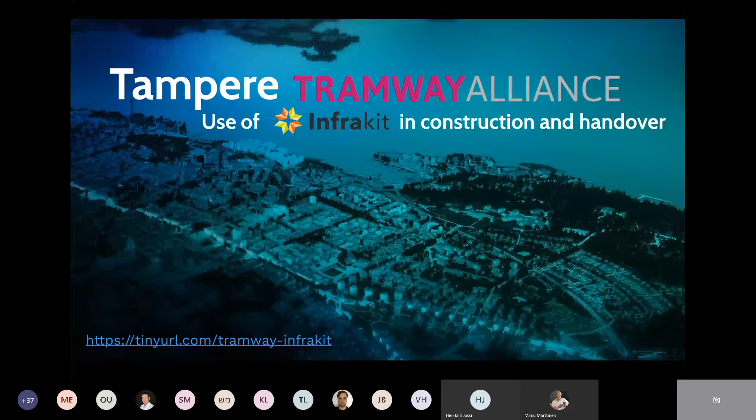All right, so Tampere Tramway Alliance, use of Infrakit in construction and handover. I'm Teppo Viinikka, head of surveying at Tramway Alliance from Sweco Infra and Rail. The main topics will be the project in general, use in construction, and handover.

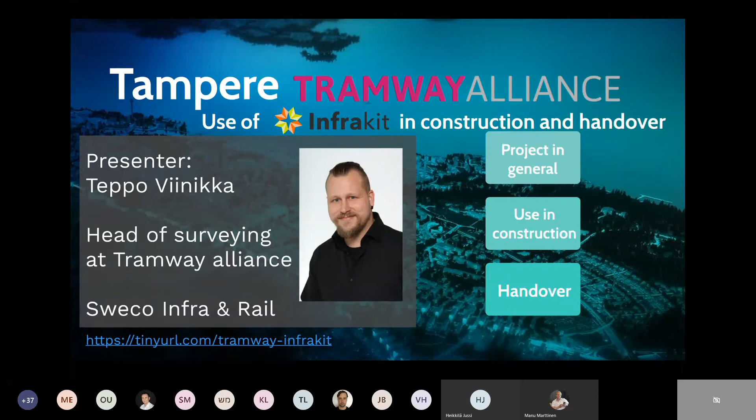So the Tampere tramway system is the first modern tramway system in Finland. It consists of 16 kilometers of dual track that goes through the main street in the city centrum. In the southern areas, there's the depot area. In the northeast corner, there is the hospital area, and the possible second stage continues from the city main street to the west at 2020.

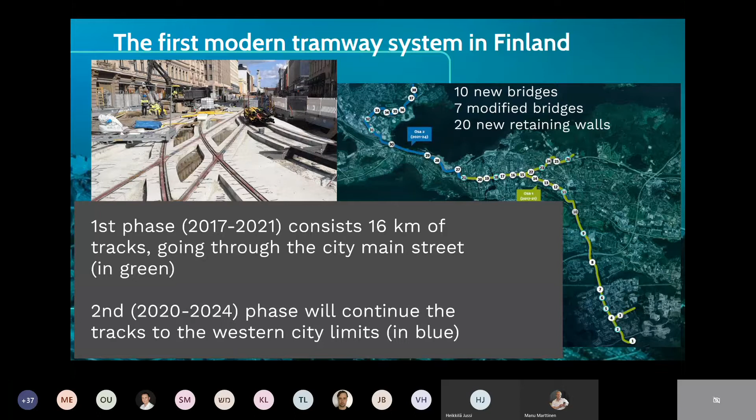Along the first phase, we have made 10 new bridges, modified 7 old ones, and built 20 new retaining walls to fit the tramway system into the current transportation systems along the way.

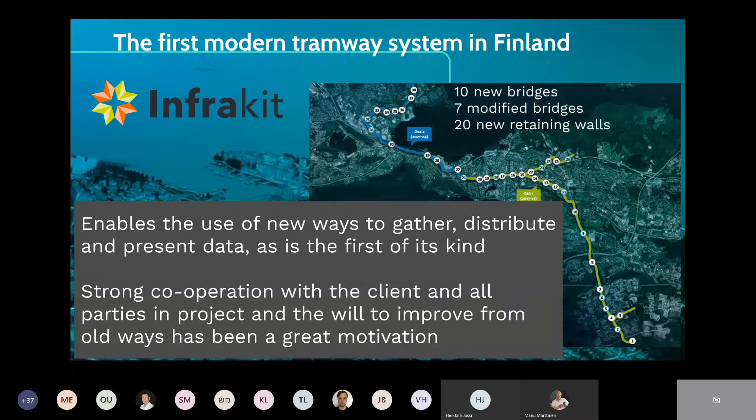As this is the first of its kind, we have put effort into doing things in a more developed way than before. We have tried to share data in a new way, as we could say. We have ditched the papers nearly completely, as all the data that goes to the site managers and builders, we have focused on PDF files and digital data. The client is also in the alliance as a partner, so we all share the benefits and negatives. So everyone is focused on doing good, and we are all focused on developing the infrastructure and the whole construction business in this area.

Numbers today: the project has used up 75% of its schedule. Work completion is 84%, and we have used up 81% of our budget. So at this very moment, we are within our schedule and budget, but we have completed work ahead of time. This is kind of an open method that we even share on our website, so all citizens and everyone can go there and follow up these percentages as we are going forward, and they can see what has been done and what are the current numbers.

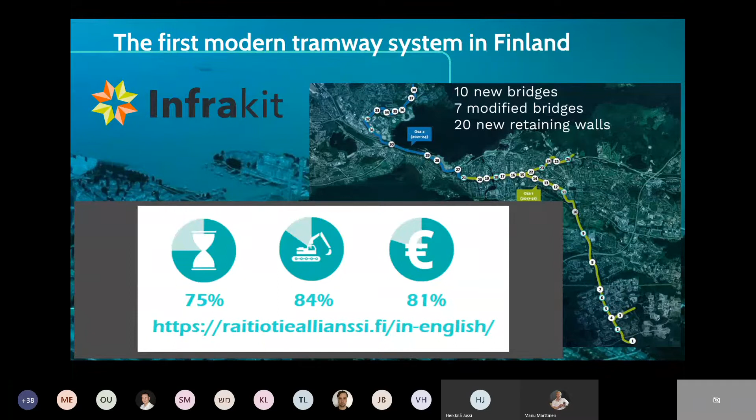So let's dive into the use in construction. I'll show you first the main data cycle and then how the different parties use and get the data and what they provide back.

Initially, the design engineer creates the design model or design, and the Inframodel coordinator checks it up. They're uploaded to Google Drive, and from there the site manager or surveyor goes and gathers the data and does another check on the data and validates it. So it has been checked by the design engineer, possibly the Inframodel coordinator, and the surveyor or site data manager. So it possibly has a triple check behind it. So it's valid data when it goes to Infrakit.

That's very critical because from there, the constructors use it, the heavy machinery and the site managers use it. And also the surveyors go into Infrakit and gather the data and use it on the field. And it's not just the people that work on the construction site who gather data from Infrakit, as also the design engineers go and gather the as-built data from there to complete the current designs or to make new designs completely from those as-built points.

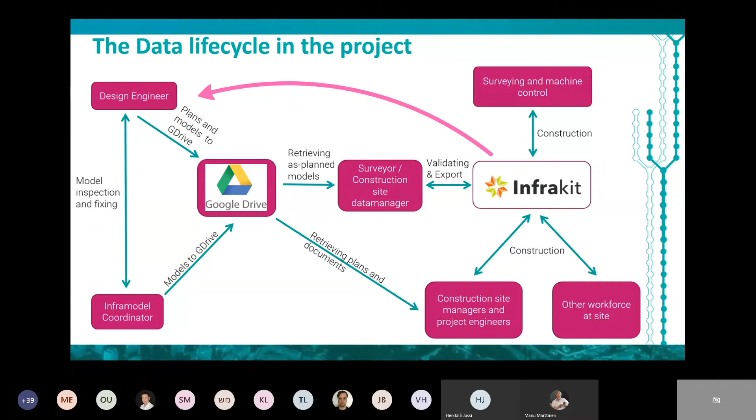So who uses Infrakit and how? All of the workforce on the site has the possibility to use Infrakit. So if you have a smartphone, you can download the Infrakit app and use it, as Manu already showed us, with the mobile app. You can see your approximate location, see all the data like points, lines, maps on top of aerial photos. And you can see the cross-section of structures, take photos, and see the photos taken by other parties.

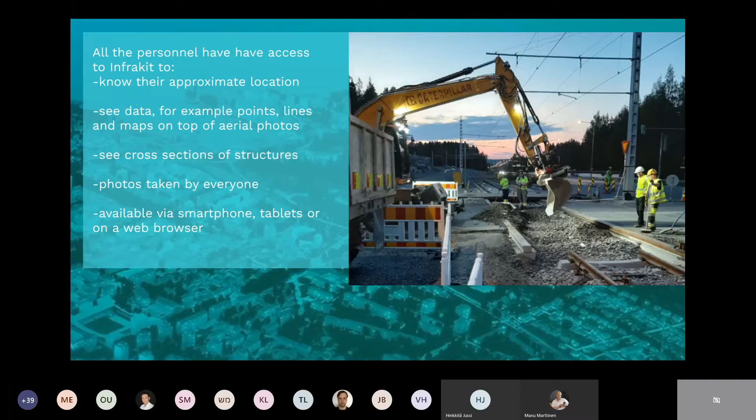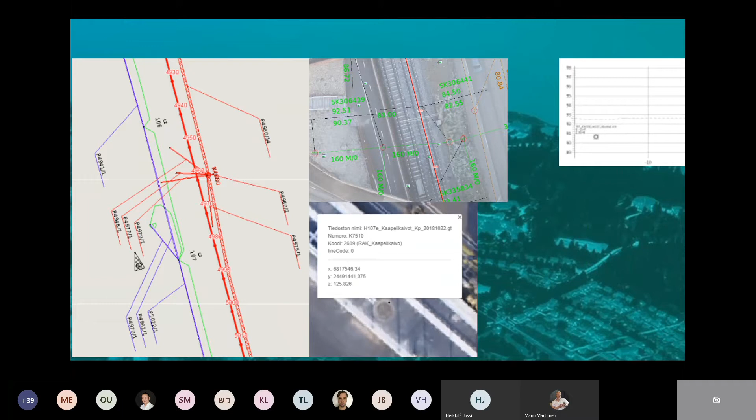The background map file format we use is DXF. And also the cross sections, the design models, you can see, for example, in the middle, the yellow design file. It has a slope in the bottom, so the workforce can open the cross section and see that it's not just flat, it goes deeper toward the left end of the design file.

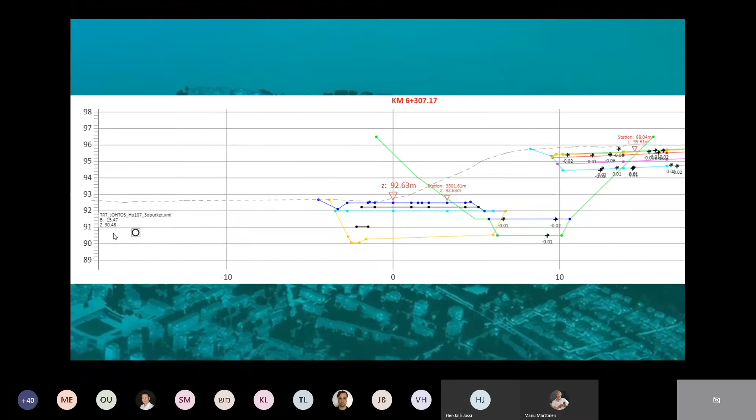So it benefits them when they can see how different designs act together. For example, here the excavations, I believe, were made simultaneously as the depth is pretty similar all the way. They can also see the pipe network design files, like on the left hand, which show the pipe diameters, the design types, and everything bound with that.

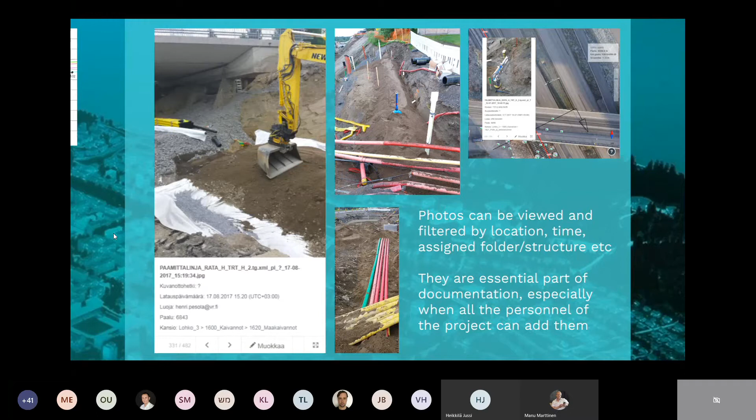I'll mention again the photos, because they can be filtered by the folder they're stored at, when they have been taken, who took them, and so on. A lot of information is within these photos. It's not just what you can explain with designs and words, but when you can see a photo of how the structures are in the field, it benefits everyone because there is just so much more data in a photo.

So, excavators. Assigning BIM models to the machinery is quite fast and easy. There have been site managers that have done that, but mainly the surveyors do the assigning of models and design files to the heavy machinery. It's done via Infrakit in the machinery tab, so you can just click the file and activate it to the excavator or bulldozer that is on the field.

And if a design file is updated, it automatically sends the updated file to the machinery, and the operators can have the latest design files within just a few minutes after it's uploaded in Infrakit. It doesn't require doing anything else than uploading the new file, overwriting the old design file that is there.

The as-built points are gathered by machinery and bound to the design files, so they're also uploaded back to Infrakit automatically. This way, the foreman can see how the excavations have been going, and if there are deviations or level changes to the design files, they can go to the site and see what is the matter, why they have done differently than initially designed. For example, there might have been softer soil than expected, so they dug deeper to reach more firm soil.

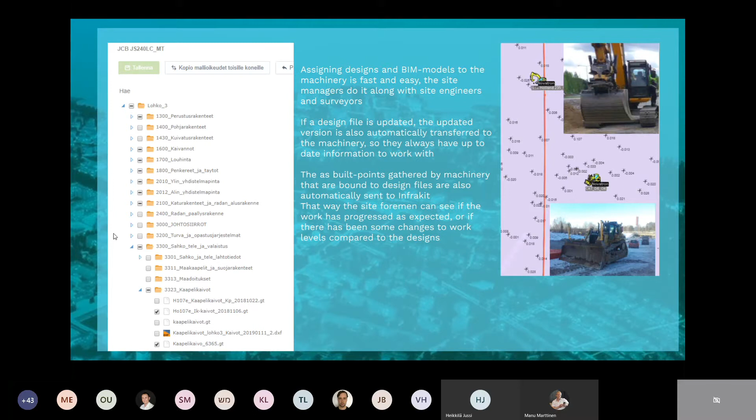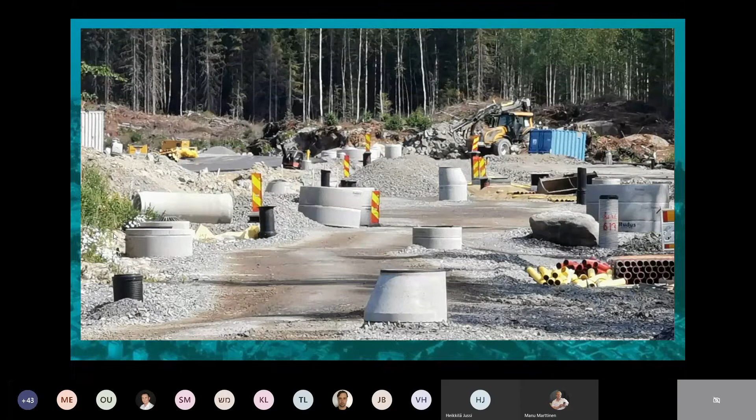So surveying. The surveyors use pretty much all the data that is usable in Infrakit. They use the DXF files, BIM models, as-built points, and design point data. They do quality control, and for example, they test and follow how the excavators are doing their work. Even though the excavators gather the as-built data, the surveyors have to double check it and do cross-sectional surveys along the way.

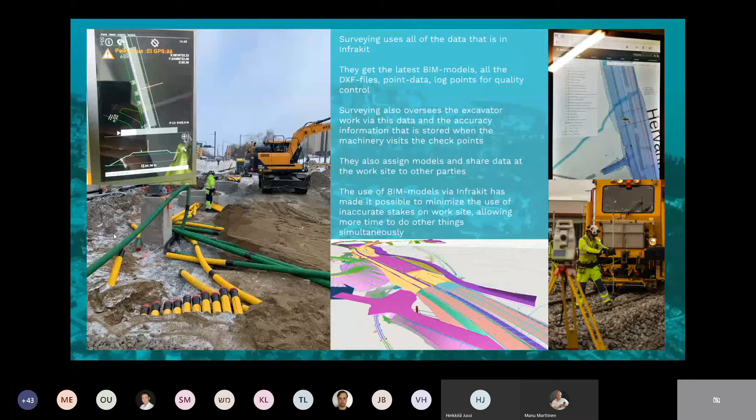Surveyors are also responsible for assigning data to machinery and other parties. As I showed in the previous picture, the use of BIM models has been beneficial in that way too, because we don't have to use the inaccurate stakes on the work site, so we don't waste time putting those in the ground, and we can use that time to focus on other things.

For example, I was working, it wasn't at Tampere, but at this one construction site where I was on the phone with the designer, surveying with the Infrakit field tablet with a GNSS surveying antenna attached to it. I surveyed on the ground, collected these as-built points, and was on call with the designer, and he told me from where the survey was, so he could complete his design, and that was as real time as possible.

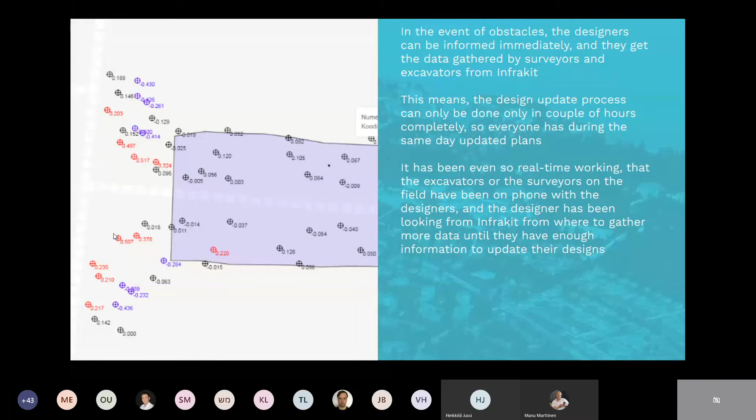Finally, the handover. One of the things I want to remind everyone is that the handover is only part of the data life cycle, and it is not the end, not the archiving or anything like that. So let's go first to the quality control.

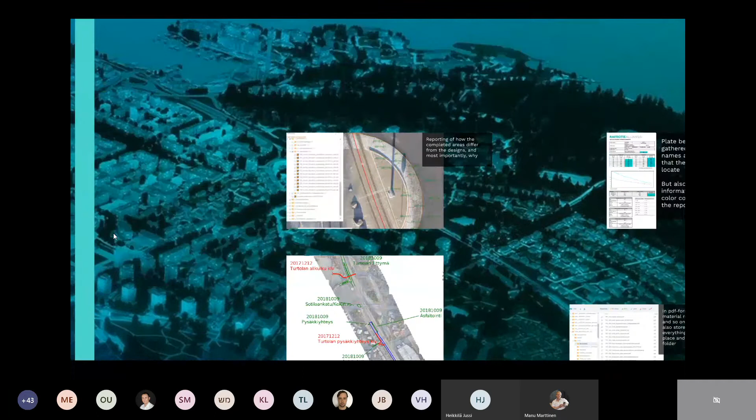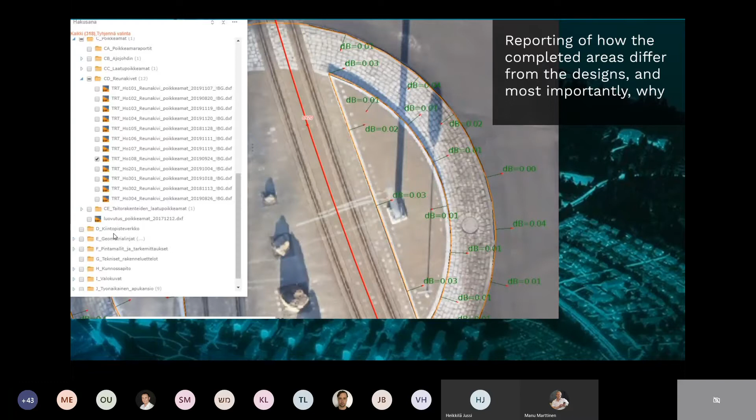This is one way to show the client when there is an initial handover, and you go on the field to view how the construction has completed. Along the handover we can show the client if there are deviations from the designs. We can show on a tablet in the field that these structures aren't there as designed, because for example we have joined into older structures like the curbstones, but in this picture all the curbstones are in place.

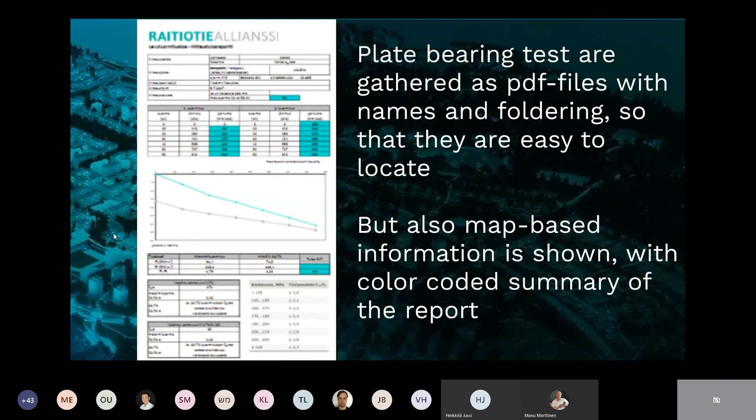We also gather the plate bearing tests. They are stored so we can find them according to their name and foldering, but plate bearing tests are also shown as a background map with color coding. In this picture, the DXF file shows these short reports of the plate bearing tests, and if the circle with the cross is red, it means it didn't pass, but all these passed at this very point.

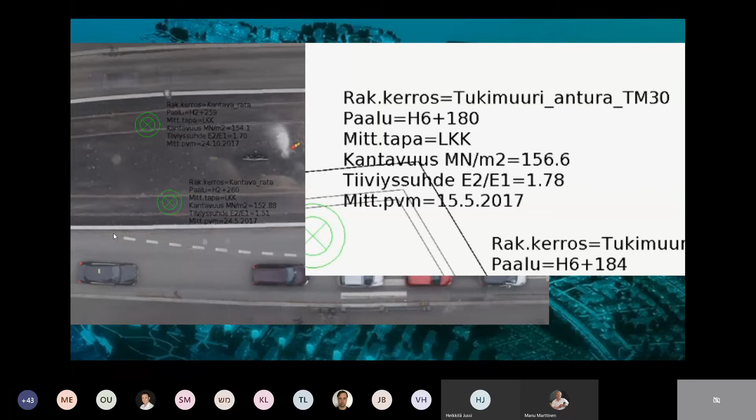This is a quick view for the client to see if we have completed the construction and the plate bearing tests according to the plans, and whether the structures are sufficient or if there need to be some updates. When it's on top of aerial photos, it's easy to locate and see how the plate bearing tests are, from where and when they're taken.

With the handovers, we store the handover areas with color coding. The colors tell which year they're handed over, and the areas indicate which structure. This is also beneficial when you try to follow the warranty times with the client, so you see which structures are near the end of their 5-year warranty cycle, and can go inspect the areas with the client.

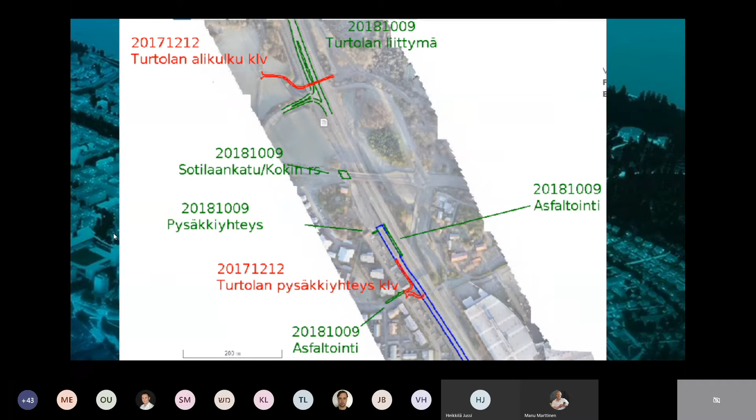All the data is stored according to these dates with their foldering. The foldering follows pretty much the date in the handover documentation. Here we can see we have pretty much a foldering system that follows the dates, as seen on the left. First there is the alphabetical storing system, not by numbers, then there's the date, and then there's the structure.

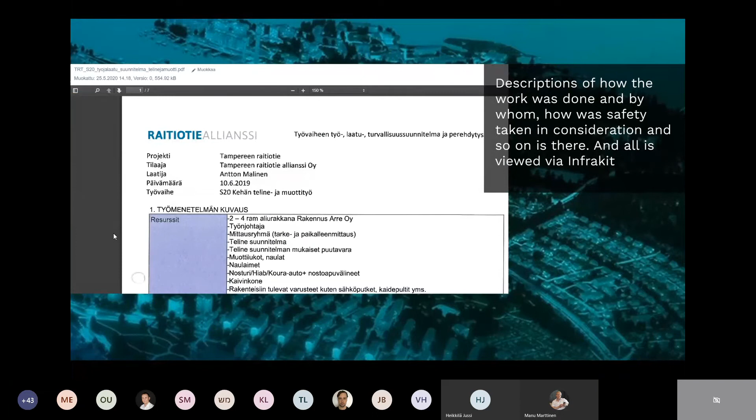Everything is stored in Infrakit, at least in PDF format. So all the quality documentation can be found here, including material reports, manuals, and so on. They can be opened in Infrakit, so you don't have to use separate software. You can do it all in the browser there.

For example, some drawings are stored in Infrakit as PDF files. Here you can see the survey of the clearance of a bridge at the southern end of the construction project.

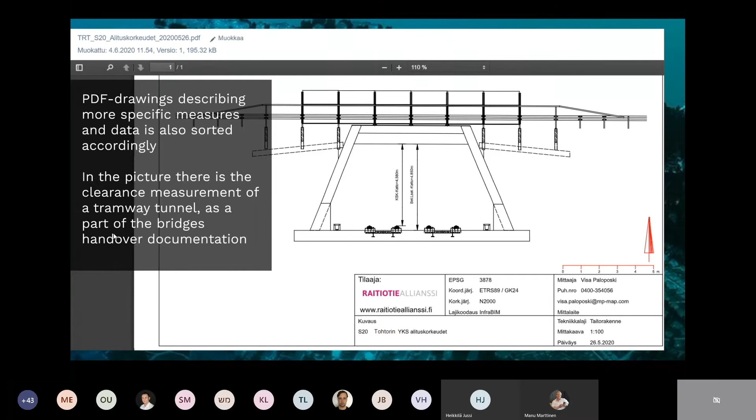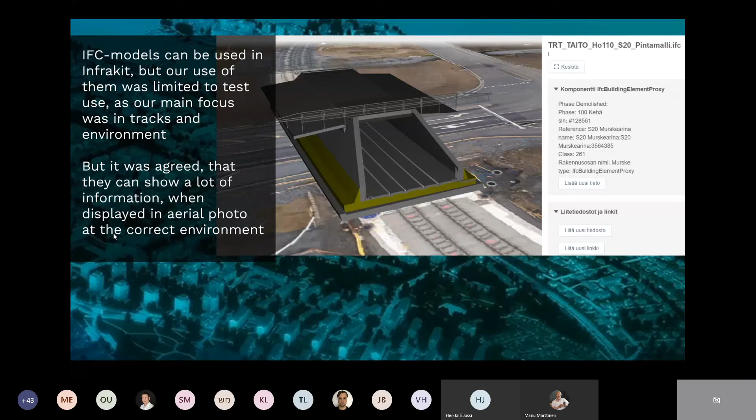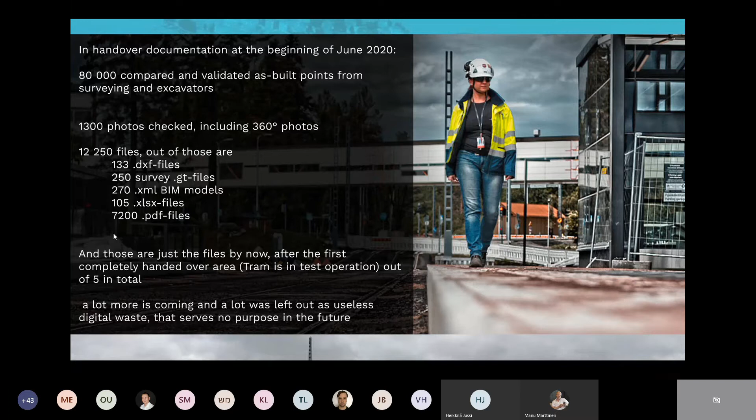At this very moment, there are quite a lot of files, but we have just handed over to the client the first area that is in test use by the tramway system, and out of those, this was the very first of 5 areas. So cleaning up the data and keeping only the necessary data in the handover documentation is essential, so we don't clog up anything. We try to avoid producing any digital waste, I could say.

The 360-degree photos, here's one spread out as a large image. We can show the client and other parties how the site was at the very moment of handover. For example, if this was handed over during wintertime, it would be a lot harder to see all the structures on the ground compared to summertime photos.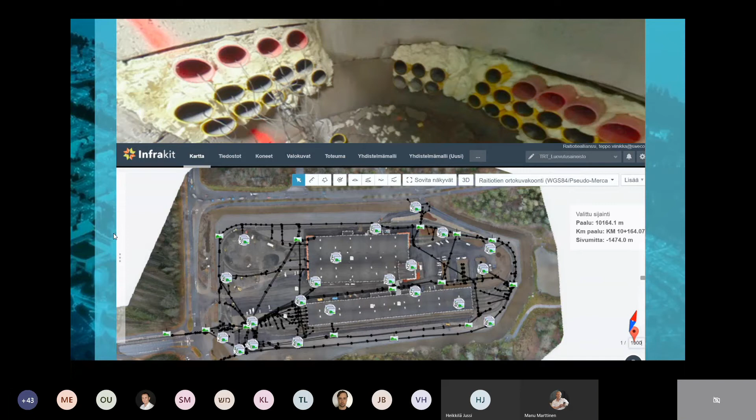We also photograph the electric manholes, so we can see all the pipes that come in. In the upper picture there's a picture of the manhole, and underneath we can see the piping network with the photos attached to the manholes. So it's all just extra data for maintenance, new designs, and validation.

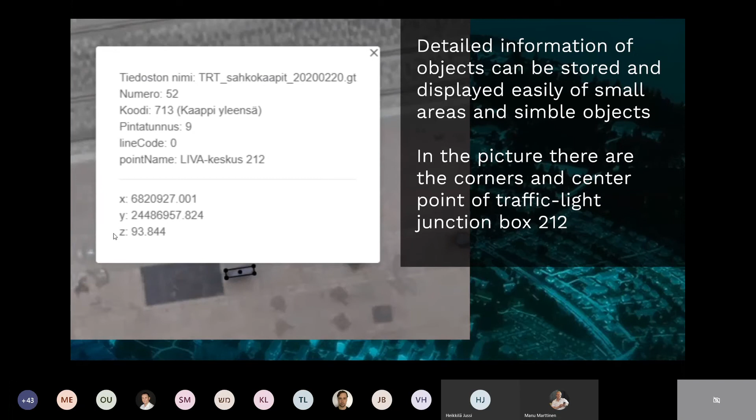You can store detailed data in .gt file format. For example, here is traffic light junction box 212 with its corner and center point. It's very specific coordinate data, but it's also possible to store data of larger areas.

For example, all the curbstones, pavements, and everything. This is the kind of data that the city of Tampere gathers from our handover documentation and uses as-is to update the city base maps and for other parties. So we gather a lot of data, and it's not just stored, it's already put in use. It's easy to validate the data when it's on top of aerial photos.

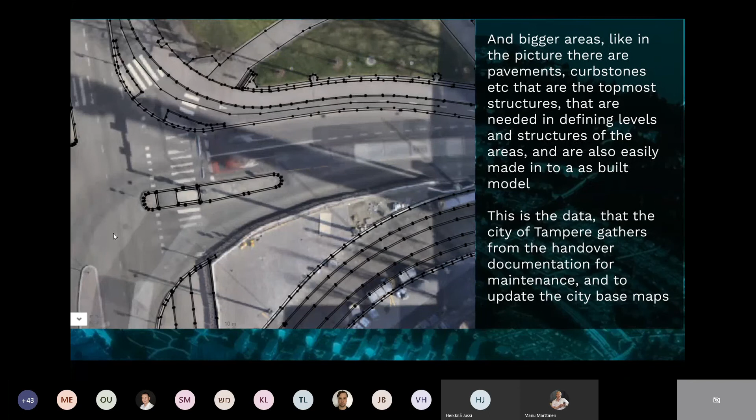For track maintenance, when you're putting tracks in the city area, you have to put them within concrete. So all the pipe networks that are in the concrete are also stored here. Afterwards, if maintenance or anyone needs them, you can find them with Infrakit.

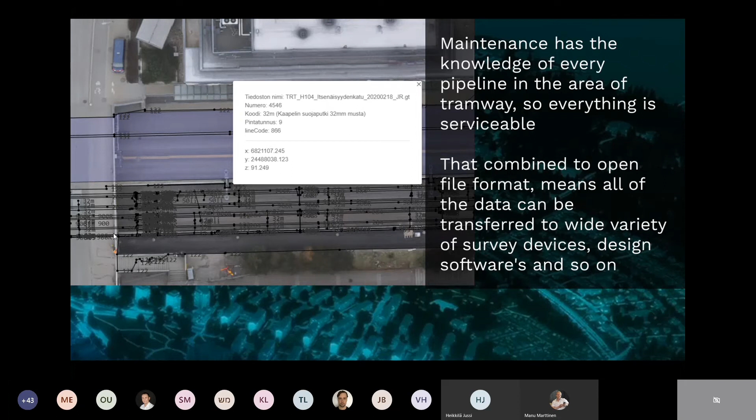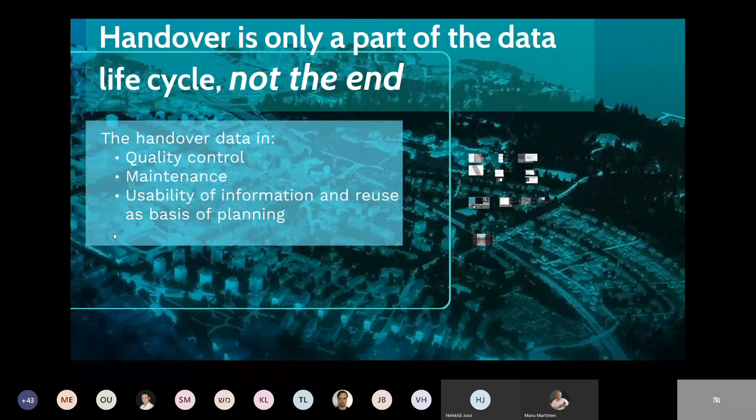And the data is in a form that's transferable to other software and machinery that the survey uses. So there's usability of information and reuse as a basis for planning.

The key element is the ease of updating and sharing data at Tampere Tramway Alliance. If you produce data that not all parties can use, it's pretty much useless data. It has to be in a way everyone can benefit from it. The designers, builders, and constructors work as a team. They meet on a weekly basis and negotiate upcoming events, design needs, and required changes.

And the way we share data, the update can be done within nearly the same day, depending on the area the update is coming from. So the constructors can get all the new data they require at a pretty fast pace. The ability to cut away waiting time is a pretty big thing when there are 500 people at the construction site during wintertime.

At summertime, I don't know what the average is, but I believe it's about 1,500 people during summers 2018 and 2019.

I'd say information that is valid and easy to share is also key in the data lifecycle. We store and archive paper copies of the designs because they're required by law in Finland, but we also store the BIM data. So in the long run it's saving money and time for the city, as the data we've collected and stored is also usable by other projects that join the Tampere tramway network in future years. So you don't have to begin from zero, you already have some data of the environment around there.

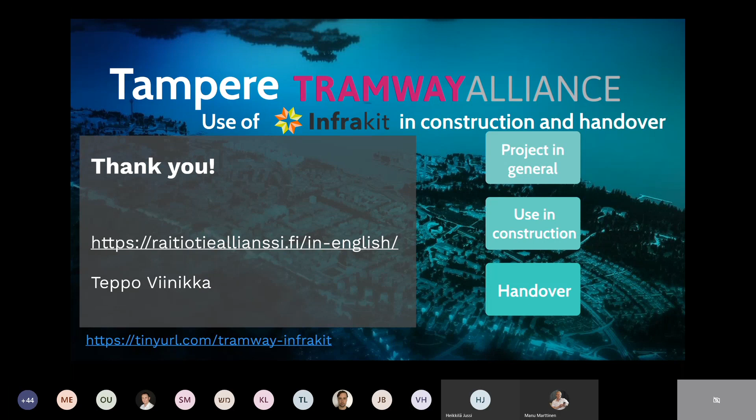Manu. Thank you. Thank you, Teppo. It was very...